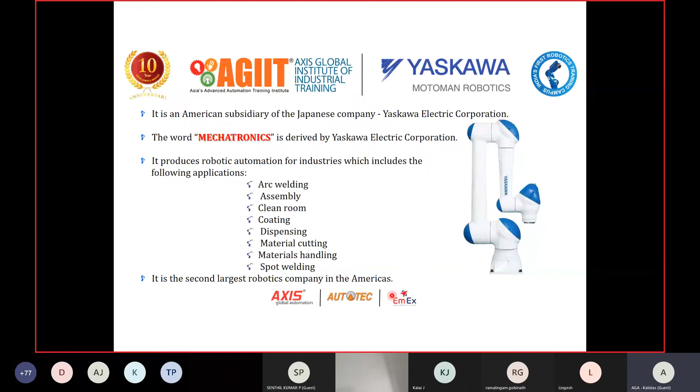So what is the uniqueness in this robot? There are so many robots available in the market, right? Among those, Yaskawa is quite unique because it has got its own patent in developing the arc robot with all the wires and cables in the top and the upper arm.

While you consider other robots, maybe it's a Panasonic or ABB or Nachi, the wires and cables which go to the end of the robot, usually called the end effector - when it goes to the end, the wires have to be routed in a specific channel out of the robot. The wires will not go inside the robot.

But Motoman, particularly Yaskawa's developed Motoman, it's a patented robot which has all the wires, cables, everything inside the robot body itself. So when we see the robot, it will be very neat and tidy. We don't have much hassle. We will be in a hassle-free environment to connect all the cables in a very good way. So this is the uniqueness of their robot.

And then they have developed a humanoid robot with 15 axis, 7-axis robot. The seventh axis is used for portability of the whole robot from one end to the other end. So many milestones have been crossed by these Yaskawa people, right?

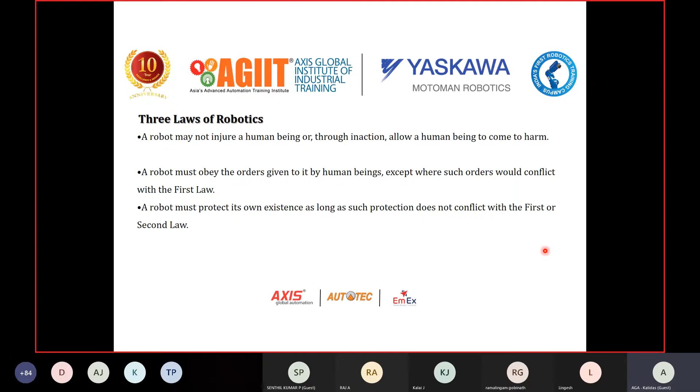We, the robotic manufacturer companies, will consider this, right? So these are the laws. Now, what are the parameters? While designing a robot, what are the basic parameters we have to consider? And based on our application, what kind of robots do we have to select? This is the next major constraint we have to consider.

So if I'm going to select a robot for one of my applications, I'll just play a video for you. You tell me how to select a robot. On the screen you can see the parameters: degrees of freedom, working envelope, kinematics, payload, speed, acceleration, accuracy, repeatability, compliance. Out of these parameters, some play a major role and have to be considered very important before selecting a robot. I'll explain how to select a robot, but before that, just go ahead with the video. After this video, we'll discuss further.

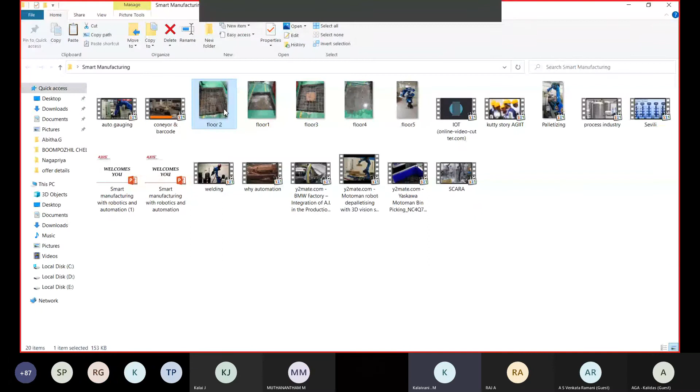So I cannot open the image.

The rest of the factors are just parameters - speed is a parameter, acceleration, how fast it can accelerate is a parameter, accuracy of a robot is around 80 microns for example. If I send it to position 1, and after 100 times of moving around and calling it back to position 1 again, the robot will be at an accuracy of 80 microns - the position will not vary. Repeatability also comes under the same factor, and compliance too - these are basic parameters. They will not affect robot selection.

The basic parameters which affect robot selection are payload, reach, and center of gravity. Degrees of freedom - nowadays usually all robots come as 6-axis robots. Usually, for industrial applications, customers will go for 6-axis; they are not ready to go for 4-axis or 3-axis, because comparing the price, the 6-axis robot is quite cheaper than the rest, since the volume they manufacture for 6-axis robots is quite higher. So that's why everyone usually goes for 6-axis. These are the factors or parameters we have to consider while selecting a robot.

Any questions you have on this? Next we can go to the programming part. Before that, if you have any questions, you can ask me.

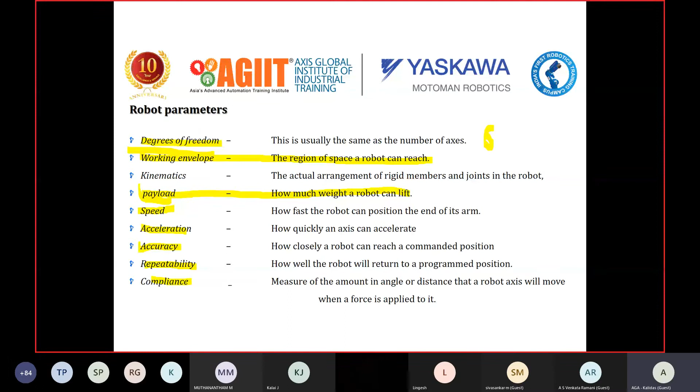So as I said before, while considering the robot installation, the anatomy or the construction of the robot is the major part, the part which has to be considered with higher attention. Only skilled persons can able to do this kind of operation. Rest, programming is not that much complex, everyone can do it, it's very easy, right? So while considering the robot anatomy, we got three major components.

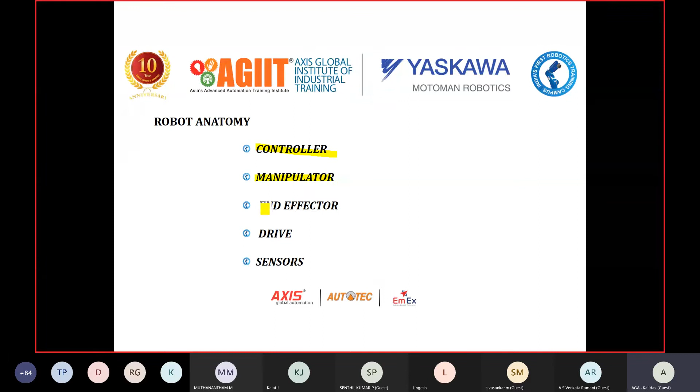One is the controller, the next one is the manipulator, and next one is the end effector. So these were the three major components of a robot. Only with this we can able to design our required robot cell, or the project what we are executing, right?

So the drives and the sensors are the supporting components that are required for the robot to perform our operations, so these were not major. The three major components are this: controller, manipulator, and end effector. Without this, we cannot able to control any robot operations, it's not possible, right?

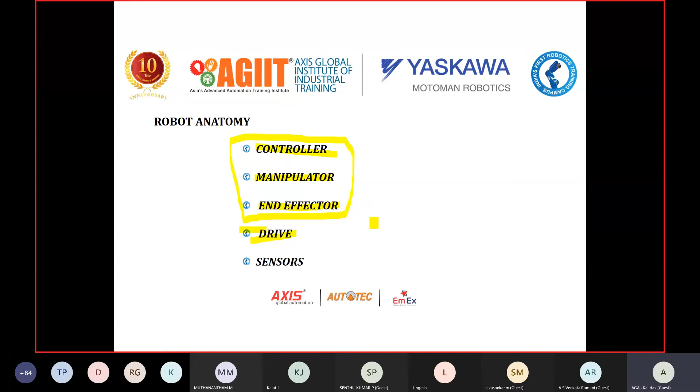So going to the controller, as I discussed with you previously in the automation section, this controller is a combination, or a controlling terminal, of the robot. We got 6 servo motors if it is considered to be a 6-axis robot, connected all over its body. So all these 6 servo motors have to be controlled from a controlling terminal, and all the 6 servo motors will be driven by a drive, like what we discussed in a variable frequency drive. A motor is usually driven by a drive.

So for a servo motor, we got a specific drive called a servo drive. So all the 6 servo motors will be controlled with the help of individual servo drives, right? So all the individual servo drives will be placed compact inside this controller. This is the major part where all the 6 servo drives will be placed inside.

Only apart from servo, we got so many other communication factors also, right? So with the servo, we can able to get one wire for connecting the robot with the manipulator, that is for the servo encoder, and another wire for the power. Totally, as a whole, even if you consider other robots, not only Yaskawa, if you go for Kuka or Panasonic or any other robot, from the controller we get 2 wires to the robot: one is the encoder wire and one is the power wire.

This power wire, the drive will give connection between the drive and the manipulator, I mean the robot. All the power going to the robot will be through this, either 340 volt or 110 volt. It is based on the robot manufacturer, it will be different, it is not constant. And the next one is the encoder cable. Encoder cable is quite constant, every robot will have an encoder cable.

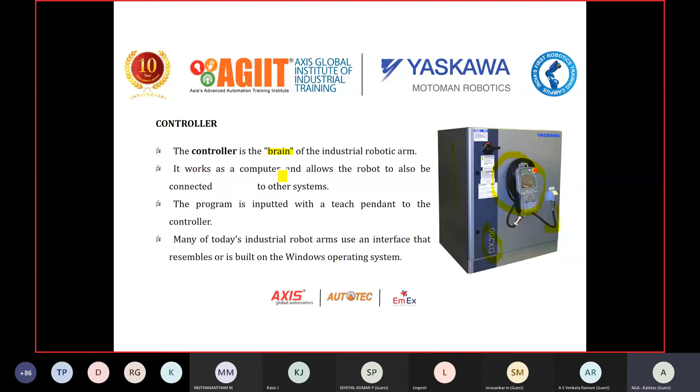So this controller is the major part. The next thing I have to discuss is this manipulator. Manipulator is nothing but the 6-axis robot. The technical term for denoting this is not robot, it is manipulator.

This manipulator, we have so many types of manipulators available in the market. Either it is 6-axis or 4-axis or even 7-axis. The 7th axis can be even external. So these kinds of manipulators are available right now, but most of the time while working in an industrial platform, we prefer 6-axis robots.

Then the manipulator joints - this is one of the major things you have to come across while discussing a robot. This manipulator is going to move forward and reverse, and it will be moving in a rotational way. While moving in a linear movement, I mean translational movement, two types of joints will be present. One is linear joint, to make the movement forward and reverse in this way. And then the second kind of joint is the orthogonal joint.

This orthogonal point is present at the U axis. I'll show you where the U axis is. You see here? So this one is the U axis. At this particular axis, the robot will move linearly as well as in the rotational axis. So this particular point is called orthogonal point, orthogonal joint.

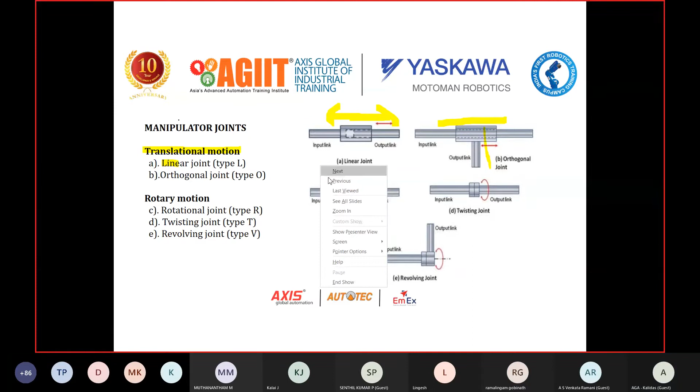And then the major part that comes here is the end effector. It is different for different projects.

Suppose if I'm going to work in a welding project, then at the end effector you have to make a welding torch at the end of the robot. If I'm going to use it for a pick and place application, like what you are seeing now...

So here we have to use grippers. We call them multi-finger grippers, 3-finger, 4-finger. Based on the object, we have to select the grippers. For some objects, it is sufficient to pick at 2 points; for some, we have to go for 3 points. So based on the requirement, we select the number of fingers in the gripper.

So this is in case of material handling. And if you are going for a paint application, the end effector should be changed to a paint spraying machine, meaning the spraying jet has to be installed at the end effector.

And if you are going for a palletizing application, where very big carton boxes have to be picked and placed in a rack, we call that application palletizing. For those applications, we have to select grippers in a different way.

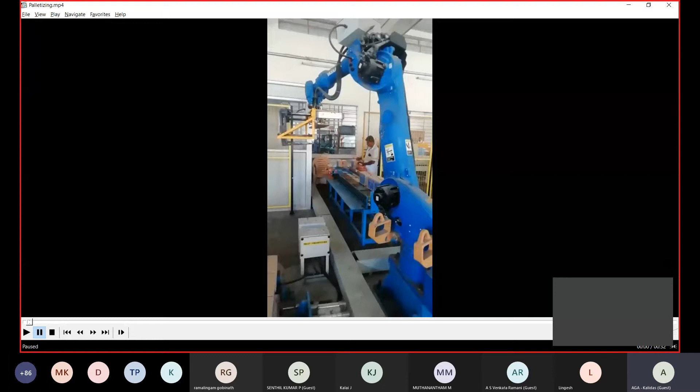This particular robot is called a GP180 robot. We have installed this at one of our customers in Pondicherry, Arasan Soap. We have executed this project. You just go through this video and then we'll discuss later.

So I'll play one more time for your observation.

In this application, this is what we call a palletizing application. These carton boxes are kept in a tray below, and for each row the robot will move and place it on the top surface. It will make around 5x4 columns, in a matrix format, an array of placing the carton boxes.

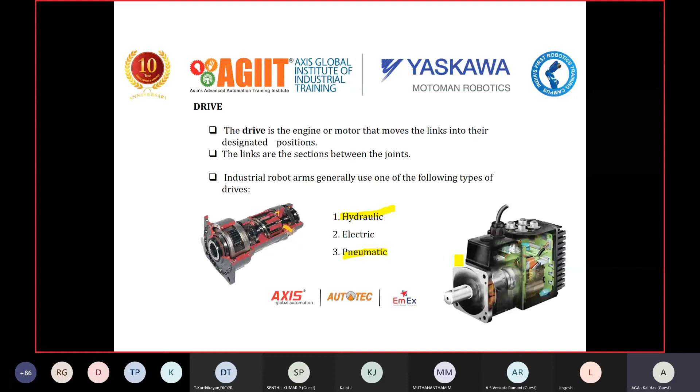Granite cutting, chamfering and polishing - for these kind of applications we cannot use normal industrial robots. For these huge heavy load applications, you'll go for hydraulic, and pneumatic for very minimal load applications. If it's a small medical kind of application where the weight of the object is less than 1 kg or a few grams, we can build a drive with pneumatic cylinders.

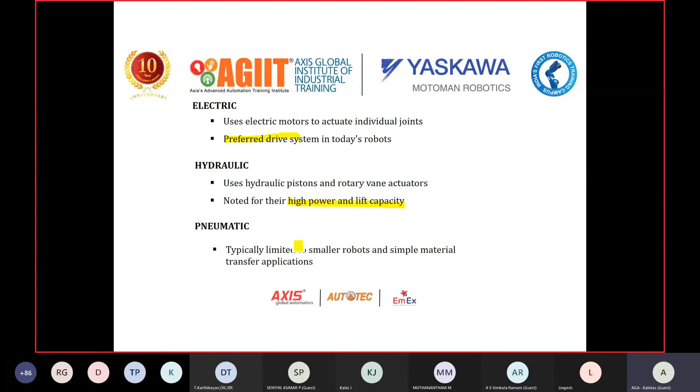So that's what I've already explained. Preferably a drive system of electric and hydraulic for high power and lifting capability for heavy load applications, and pneumatic for smaller robots, material transfer kind of applications where the weight will be very minimal, maybe a few grams. For those we can use pneumatics.

And then finally, the sensors. As I said, sensors play a major role to detect the environment as well as to detect collisions. We have so many sensors by default, including collision sensors, and many sensors available in the market for determining environmental conditions such as light and sound, which can be given as input for the robot, and based on that the robot makes decisions on its own. These sensors are connected directly to the controller, as I've already explained while discussing the controller part.

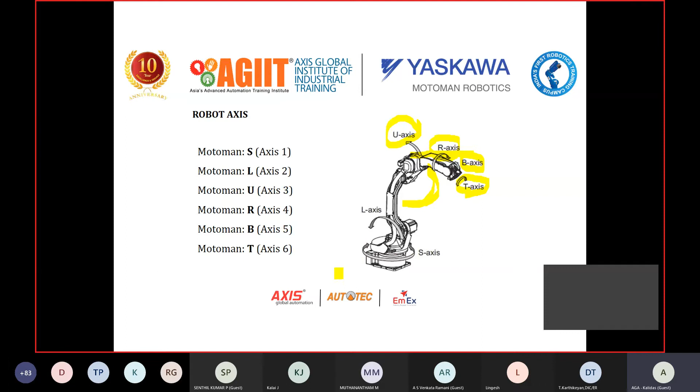While considering a robot, we got 6 major axes. We usually call it SLURBT. The S axis at the base rotates in a rotational way of 360. Even though it rotates 360, the robot cannot access 360 degrees. The maximum accessible is 270 degrees. It is not possible to exactly go behind an axis. Right now, a 360 degree robot in Yaskawa Motoman series we don't have.

Then the L axis, this is the longitudinal axis. It will move in a linear way, for that we are using this one. And then U axis got linear as well as rotational. R is rotational, B is rotational, and T is rotational. At the T axis only we used to attach this end effector and all.

So this is the hardware of the robot. For each and every axis we got a servo motor based on the load, based on the robot capacity. So as each axis we got a servo, we got 6 axes, so we got 6 servo motors incorporated together to form this robot. This is the basic hardware setup of the robot, right?

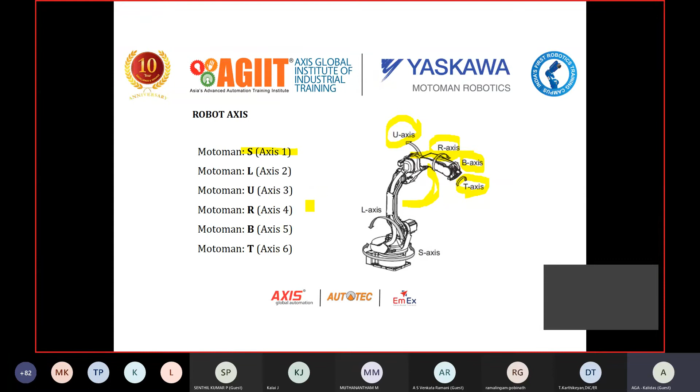While coming to the programming, there are so many programming methods available right now. As it is equivalent to PLC, we got so many programming methods for each and every robot manufacturer, maybe Yaskawa or KUKA or ABB, whatever it may be. They don't have a common nomenclature.

So initially they started with task in plain English. They used to type, okay, robot move to position 1, robot move to position 2. This is called task in plain English. I'll show you the programming method like this: move to position 1, move to position 2, close gripper, move to position 4. These kind of operations were made initially, but this caused major problems in interfacing. I mean, the robot cannot understand each and everyone's commands. It is not possible, so it's quite difficult to interface.

Then the next method we come across, everyone started accepting, is assembly language. This one is quite easy for everyone, as well as standard commands have been pre-programmed, so that each and everyone cannot give their own words. So it will be easy for the robot to understand. Right now in Yaskawa we use this kind of variable assembly language. Almost in most robots, either it's a KUKA robot or Panasonic robot, it will be very similar to this, but the keywords will be different. In Yaskawa we are using 'move', but in Epson or some other company robot, it will be in a different way, maybe 'jump' or 'call', something like that. So the method will be very similar to this.

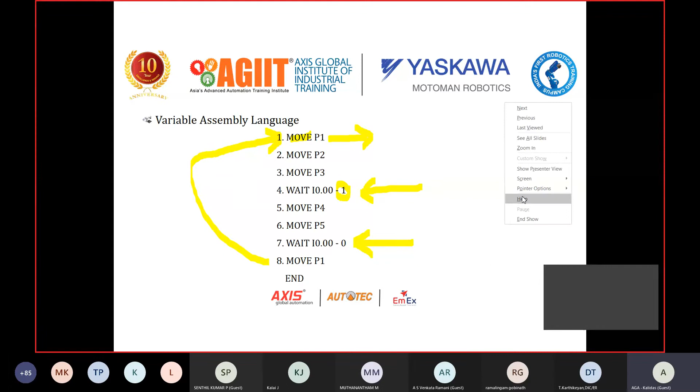I'll show some other robot programming as well. This is, as I said before, the programming method for the Yaskawa robot, and there's one more robot called Epson—I've also included the Epson program here.

Instead of move, in Epson we have the instruction called jump. So instead of a move instruction, we use jump, and similarly we have wait on vacuum, off vacuum—this is in reference to the gripper, turning the vacuum on or off. After that it goes to the desired position, and then there's a function end.

After this happens, the loop control goes to the next one—it's a cyclic operation, so it jumps again to P1. From P1, the pointer comes back again, executes all this, and the program pointer goes there again. It's very similar to C or C++, but the programming language is machine level language, what we call machine language.

So this is the approach for programming methods. Initially it was like this, then we changed to the new method. Apart from this, we have the Robo4 method and Inform3 method—each has its own programming method. As I said, this variable assembly language method is accepted by all companies or manufacturers in the world—Yaskawa, Panasonic, everyone uses this method.

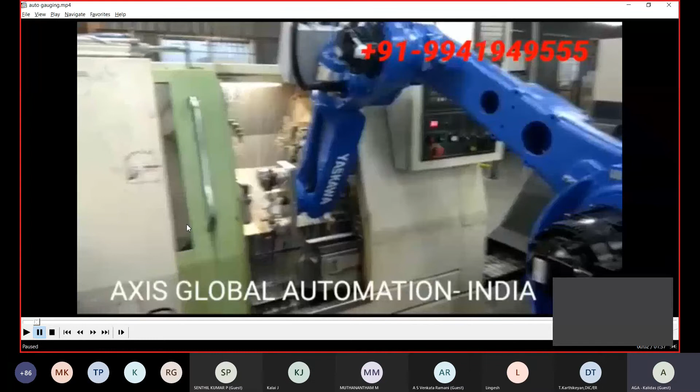So this particular application is pick and place application. We usually call it machine tending for CNC. For this robot, we have installed GP12. This unit we used to call as auto gauging.

I'll tell you the usage of this later in the video. Auto gauging - after gauging is completed, if the part is okay, then it will be transferred to the next operation.

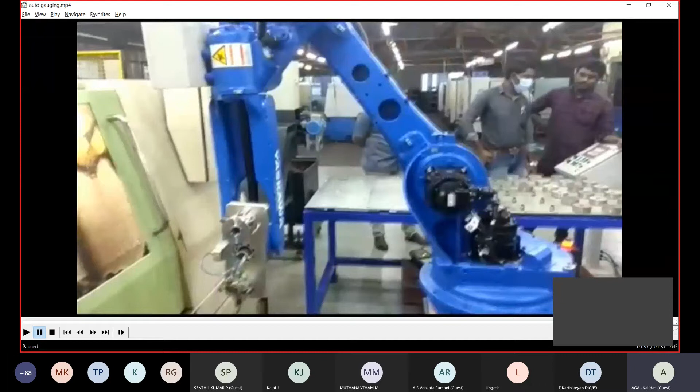Nowadays, getting manpower for operating the CNC machines is quite difficult. So at one particular time, I told there is a process called auto gauging. I'll show you here one more time. This one we used to call auto gauging. Auto gauging is one of the current trends being installed in most manufacturing units. I'll tell you the reason for this kind of operation.

Even though we install a robot, without this auto gauging, the operator has to deal with the CNC machine running all day. The machine has so many tools for its operation, and the tool will definitely have some problems. It may be worn out, and the product coming out from the CNC machine will not be exactly the dimension required as per the drawing.

So what the operator will do is come down and check the output job randomly, whether it is as per the drawing or not. If there is any deviation from the drawing, he used to make some tool correction in the CNC machine.

But what we have installed here is this auto gauging machine will detect the deviation, how far the job is deviated. Then this tool correction input will be given as feedback to the CNC, and it will be corrected automatically. So there is no need of manual intervention, and we have totally eradicated all manual interruption from the CNC machine, and this cell is completely automated without any manual interruption.

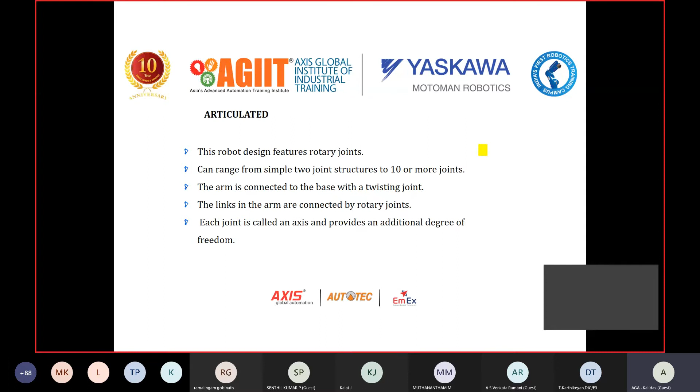And then the next one is - so this is the image of the articulated robot. We have already discussed about the axis, each and every axis. And then I'll go for the next.

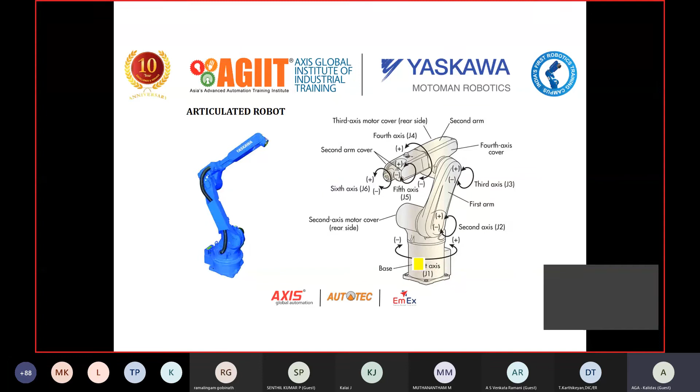It is called Cartesian robots. Cartesian robots are not equivalent to articulated. I'll show you the image here - yes, this is the Cartesian axis. So if I want to handle the operation in a linear movement alone, at one particular axis alone, for that we can use these kind of Cartesian robots.

So based on it, completely based on application, this particular robot cannot handle heavier load. This robot can be used for applications like gluing application, and welding application - very small welding application, not in a big way.

So majorly it is meant for gluing, spray painting, and 3D art kind of works, I mean wooden carving and plastic engraving. So even in 3D printers nowadays, you can see this kind of Cartesian robots. If you go to Amazon and see 3D printers, all the printers have been built with the help of these Cartesian robots.

So instead of picking and placing job and material kind of operations, this particular Cartesian robot can work without picking the job at the same floor. These kind of operations can be done - gluing, carving. So for these applications you can use this. This is Cartesian robot.

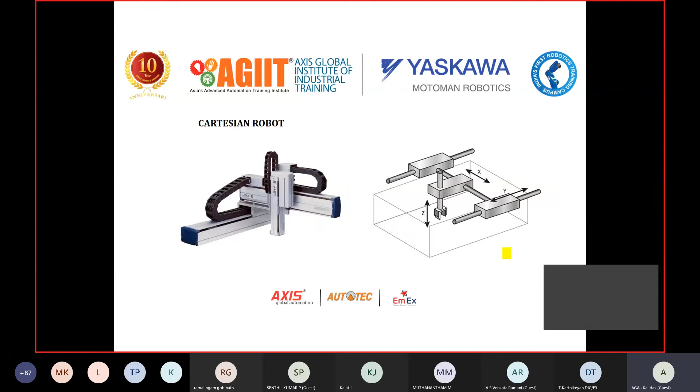The other kind of robot we have next is polar robots. This polar robot, as I said previously, has only 3 axes, but at the same time the load it can handle is very huge. For example, for granite cutting and polishing applications, we can make use of these polar robots.

It will go and pick a granite stone. The granite stone will be very huge, taking a weight of about 3 to 4 tons. It can simply pick it up very easily, and then place it in the cutting machine. After cutting is done, each stone will be placed on the conveyor, and from conveyor to the polishing machine. After finishing polishing, again it will be placed in the wooden pallet, and then it will be packed up. So for these heavy load applications, we use these 3-axis polar robots.

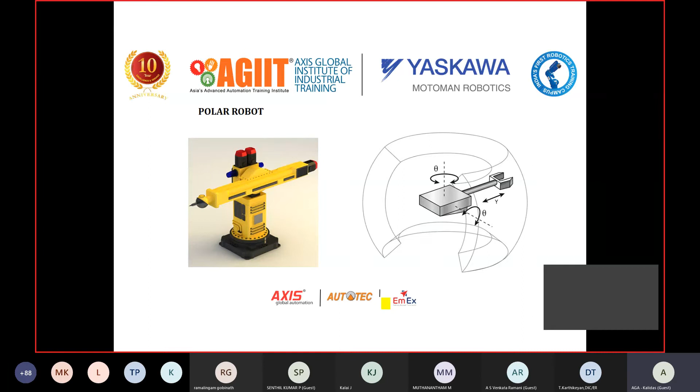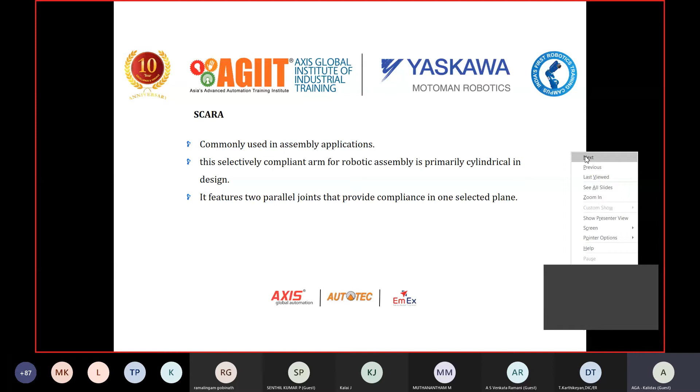And then SCARA robot. SCARA robot is nothing but a 4-axis robot. This particular 4-axis robot is mainly used in semicon industries, not in the manufacturing sector. So this we usually call it as SCARA. It can be used for semicon industrial purposes, in the manufacture of PCB, capacitors, IC chips manufacturing, or microprocessor manufacturing units, or in hard disk manufacturing units.

For these semicon applications, we can make use of this robot. For this robot we get an accuracy of 80 microns. The reach, everything is same - we have to check the reach and payload, and then center of gravity. The major difference between the SCARA robot and the articulated robot is, SCARA robot has 4 axes, articulated has 6 axes with a rotational axis. If we need to flip any object from a vertical plane to a horizontal plane, we cannot make use of this robot. It is not possible. So flipping and all kinds of operations can only be done with the help of articulated robots. So I'll play one more video for this SCARA robot so you can understand its operations.

You can able to understand its operations.

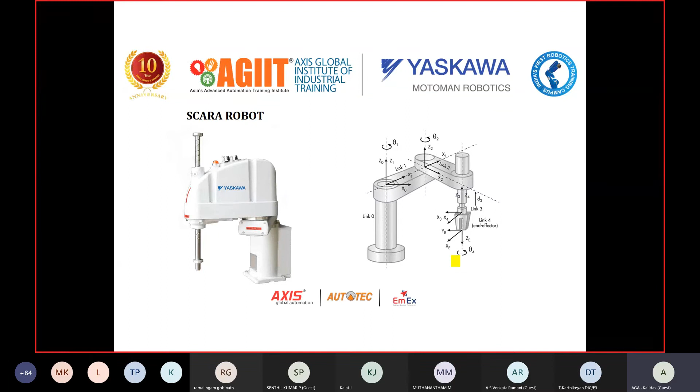So for these semicon industrial applications, we can go with this SCARA robot. And then the next one is Delta robot. I think many of you have come across this Delta robot in YouTube videos as well as Discovery Channel. The speed of the Delta robot - at maximum speed it can pick around 6 to 8 picks per second. We used to call it like that. It can pick and place an object, 6 objects per second. This is the maximum speed of the Delta robot.

This can be seen in the food processing industries where conveyors have bread or food items or butter packets. Everything can be picked up and placed in an orderly way, while in the production conveyor it used to come in random parts.

To arrange everything in order we can use these kinds of Delta robots. It can randomly pick the object and place it in a linear or matrix arrangement, or as per requirement. For high speed pick and place applications, we can use this Delta robot.

At the end effector, we can have a gripper, a suction cup, or a vacuum cup. Based on the project we are implementing, the end effector may change.

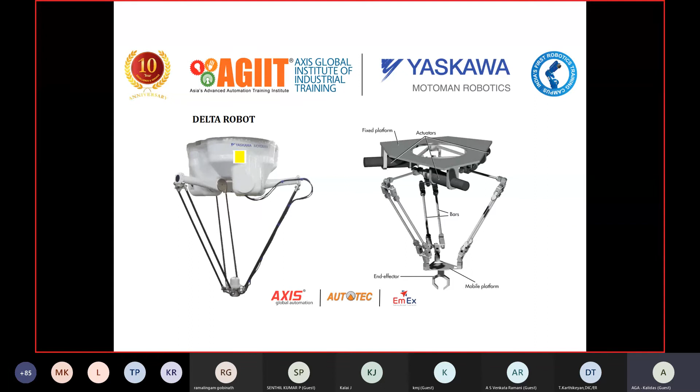It is being installed at the top of a structure, not at the base. If you see all other robots, every robot will be mounted on the base, but this one is an inverted mounted robot - we call it that. It is quite different from other robots. This one we call the Delta robot.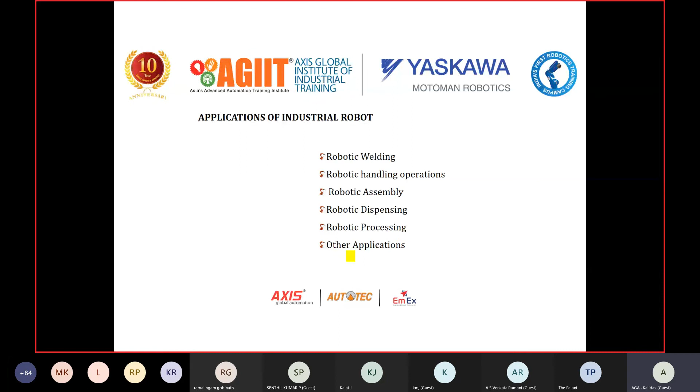As I said, the applications of industrial robots are rapid - for welding application, handling application, assembly operations, dispensing, processing industry, and so many applications we are using them. If you come across handling applications, we have machine tending, palletizing, metal machining, plastic injection molding.

This is for pick and place application. We have the MH series, specifically meant for pick and place applications. For heavy load applications, we can go for the GP series. I'll show you that one also.

The next one is for welding application. For welding application, we have the MS series. At the end we have the end effector. For each and every specific application we have a robot - a series of robots.

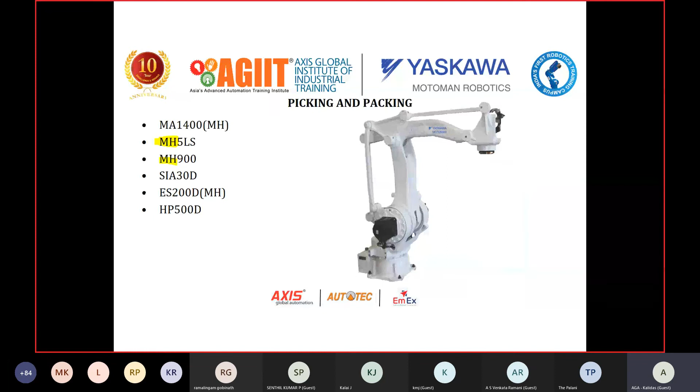To distinguish, for example, if it is a welding application, the robot controller will be loaded with special programming parameters for welding. For handling application, the program or operating system will be different - that is the major difference. Otherwise the robot structure or build, everything is the same. Only the internal software architecture and nomenclature will differ for welding and handling.

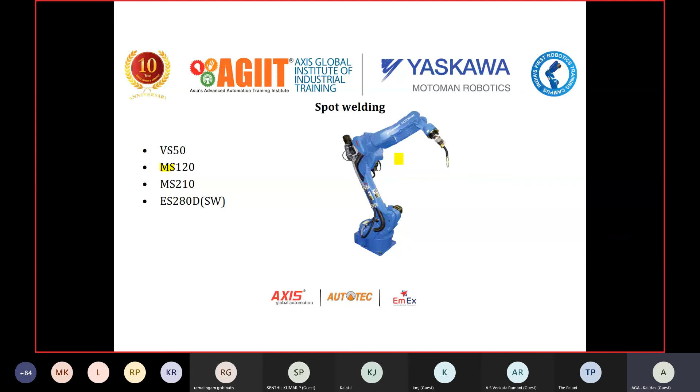For arc welding we have a specific robot, with specific software to interface with the power source, a third-party power source. That's it - the rest of the thing is everything the same. This is what we are trying to say.

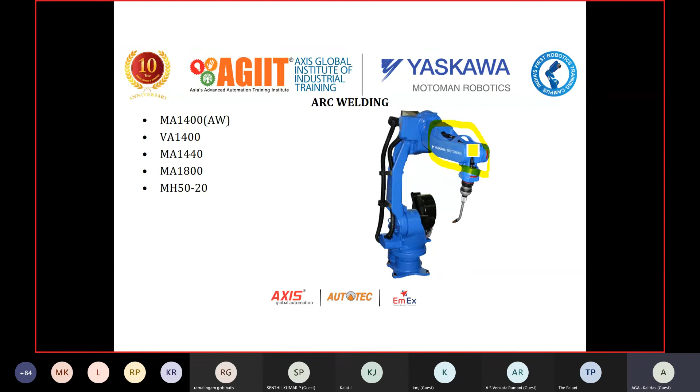All the cables are inside the robot itself - there are no cables outside, on the top axis. That's what I'm trying to say. If you go for some other Panasonic or KUKA robot, all the cables will be coming outside this way - they will not go inside the axis, on the top axis. So this is for arc welding robots or welding robots.

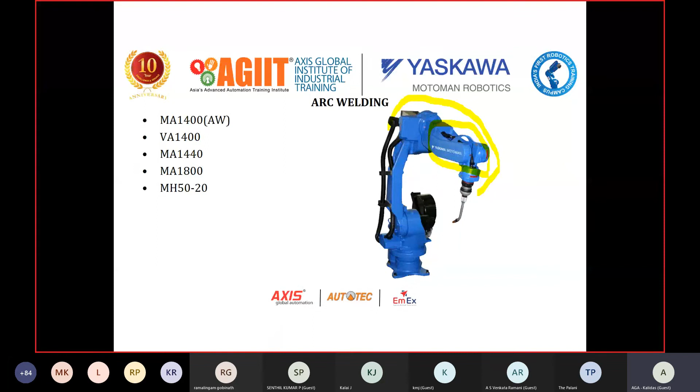For assembly we have so many robots. We have the MH series, specifically meant for assembly, with 2 or even sometimes 15 axes coupled with the robot arm. You can assemble nut and bolt and assemble semicon parts - everything can be done with the help of these assembly robots.

For dispensing applications like gluing and painting, we have specific application robots. This particular MH series is meant for general purpose application - you can use this robot for any application, whether welding, handling, or painting. The only thing is we give you software installed in the controller for that particular purpose. If you buy this MH series robot for welding application, then welding software will be installed in the controller, that's it.

For dispensing also we can use this. For painting alone we have a special purpose robot - we cannot use this painting robot for any other application. If I am going to buy a robot for painting, definitely we have to go for this EPX series, because for painting there are so many factors to be considered: environmental conditions, spray speed, and acceleration, deceleration speed. You see here the body is completely closed. For previous robots we had some open space - the cables and trays would be in an open area.

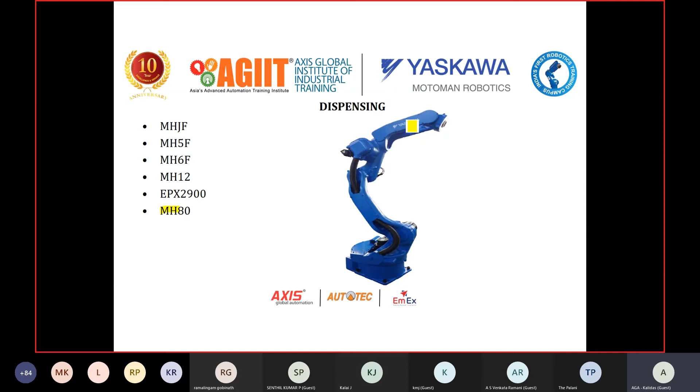Consider a paint robot. Since for painting application the spray is done in a random way, you cannot expose any part of the robot to the air, so everything is completely enclosed. While closing every part, we consider the heat exchanging unit, and while spraying, all the paints go onto the surfaces and engage the interfaces, so each and every axis gets locked. Considering all these factors for paint application, we got special robots with the EPX series.

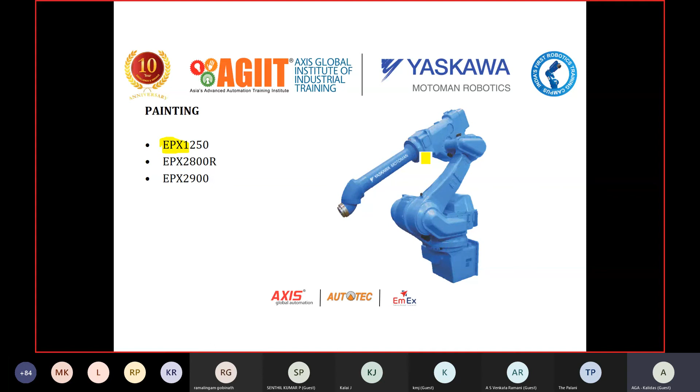For processing industries, metal cutting, laser cutting, and water jet cutting applications, we got a special robot called the HP series. This HP series is specifically meant for water jet application and laser cutting application. For cutting applications we have special robots.

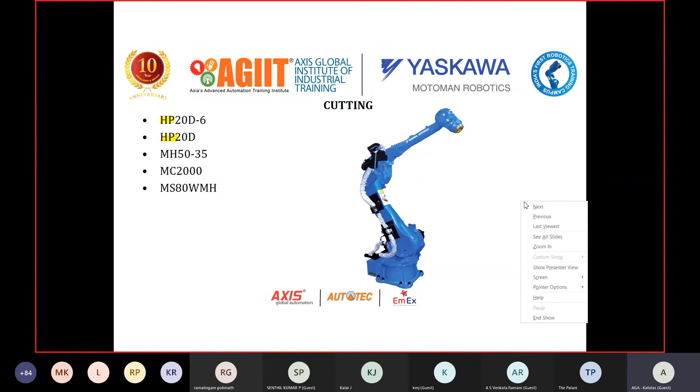Now a bit of history. Previously we had automation history, right? Likewise, robots also have their own history. Initially we had only single axis, then multiple axis, 3 axis, 4 axis. Right now what we use is the Motoman series robot, which was initially made in 1977. This was the first 5-axis robot. Before that, we had only 1 axis and 2 axis, something like that.

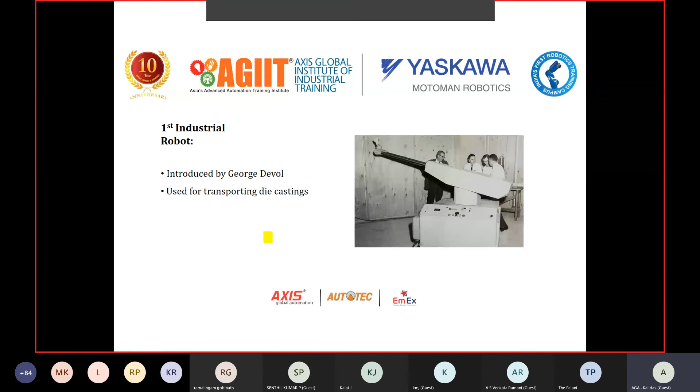The first robot was made by George Devol for the General Motors GM division, and this one used to be called a cylindrical robot. Here is the first cylindrical robot. It can move in a cylindrical way, up and down, and it can also rotate. For very basic applications, it was used at Ford Motors.

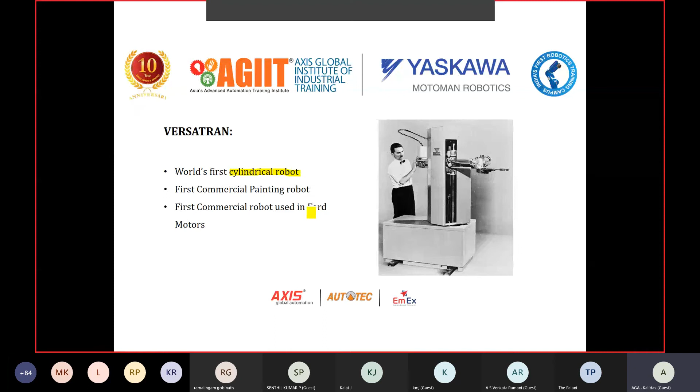Next, this is the first robot for pick and place. It was used for General Motors, GM.

This one is the first robot driven electrically with 6 axes, the first electromechanical 6-axis robot. It was designed by KUKA.

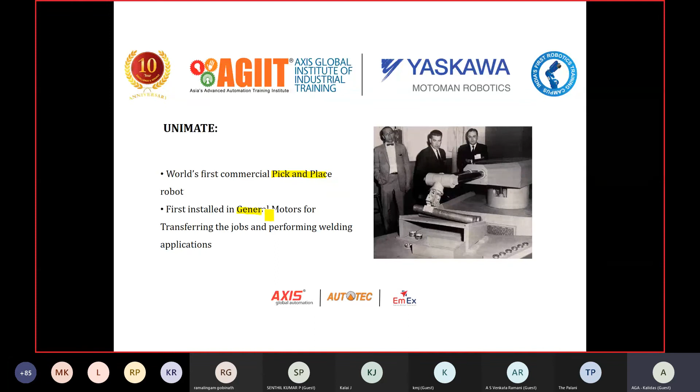KUKA is one of the major competitors of Yaskawa, so there's heavy competition between KUKA and Yaskawa in and around India as well as Europe. In India, most customers prefer Yaskawa because cost is the major factor, while in Europe and other regions they prefer KUKA because cost is not a major factor there. Considering technical aspects, KUKA is quite higher compared to Yaskawa. So based on the region and market, each manufacturer gives their best.

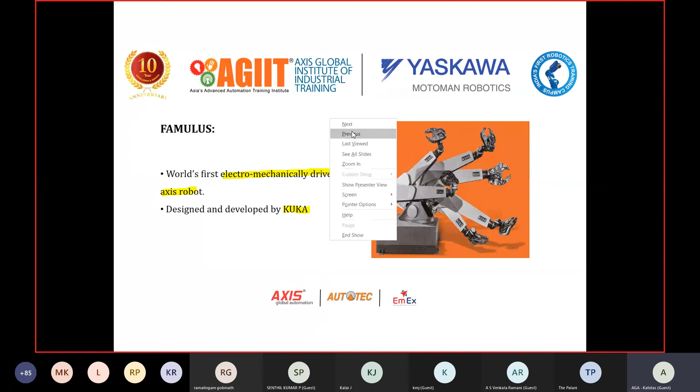The silver arm robot has installed sensors incorporated in it. We have controllers separately, and sensor feedback is fed back to the controllers. We have touch and pressure sensors in the grippers itself. This particular silver arm robot was very specific.

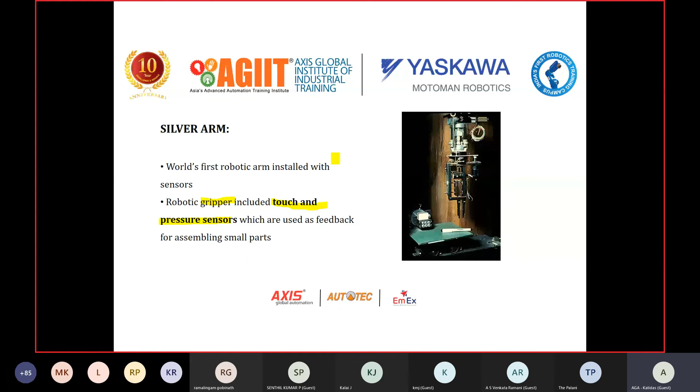This one is the ABB robot. Initially it was called Asea, but now the commercial name is ABB. You might have come across this name. In major electrical appliances, wires, and control panels, everywhere we can see this ABB robot. The Asea IRB was the first model released as a fully electrically driven robot.

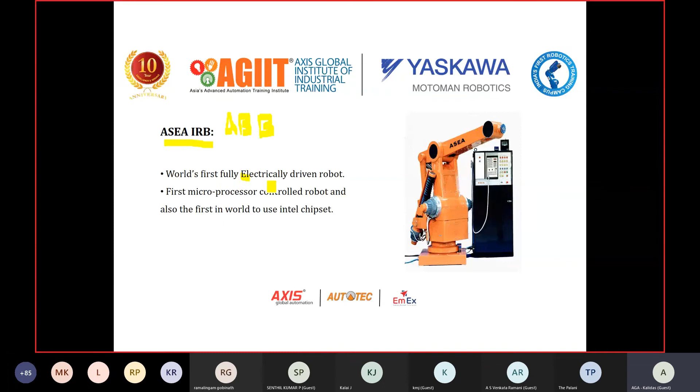Next comes the Motoman series, developed by Yaskawa. In the year 1977, it had 5 axes, completely driven by motors, and could carry a payload of about 10 kg. This was the first robot from Motoman Yaskawa in 1977.

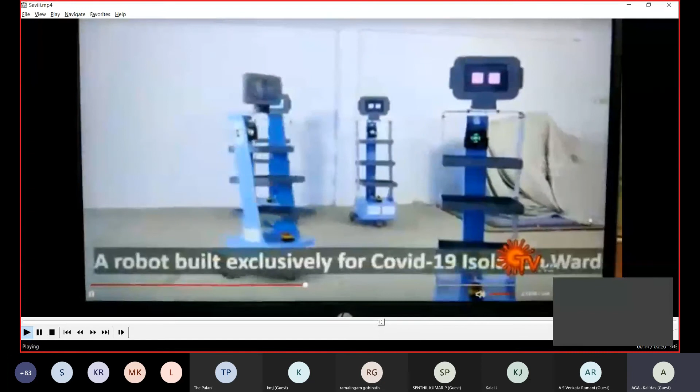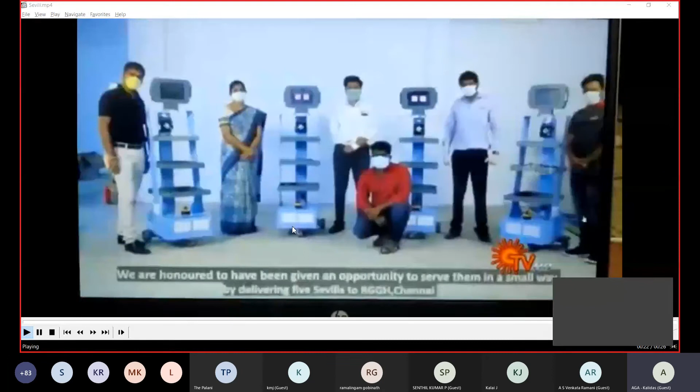So this is completely designed by our Axis Global team. We designed the mechanical aspect as well as interfacing with the patients. For that, we got a camera at the top and then a 7-inch touchscreen at the top. So everything was done by our team.

In the near future, we are in the idea to develop our own robot, own 6-axis robot. So with the collaboration of your college and your inputs, in the near future we can develop our own robot, maybe. So apart from this, I'll show you a welding application also.

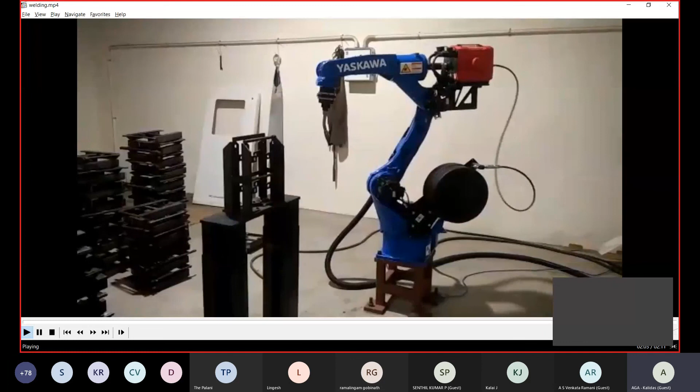So this one we used to call as a MIG welding robot. For MIG welding interface with the power source, we got specific communication modules. We used to call it Profinet, or sometimes DeviceNet cards will be available based on the manufacturer. It depends. So in this particular project, we have interfaced our Yaskawa robot with a large welding machine, which will support DeviceNet communication. So with DeviceNet communication, we are able to control the welding parameters while doing welding.

Also, nowadays, what we have developed a lot is, instead of teaching the robot, we do the program offline based on the welding job. We get the drawing from the customer, teach it offline, and just download the program to the robot. So the robot will go directly to the point where we have done the program offline. It will go to the point and search for the welding point to be done.

Through touch sensors - we have special sensors called touch sensors - the robot will determine the area to be welded, and then detect the start and end point of the welding region. Then it will do welding automatically. So these kinds of advancements have been happening in the market over a period of 3 to 4 years. So for welding applications also, numerous advancements have been performed, right?